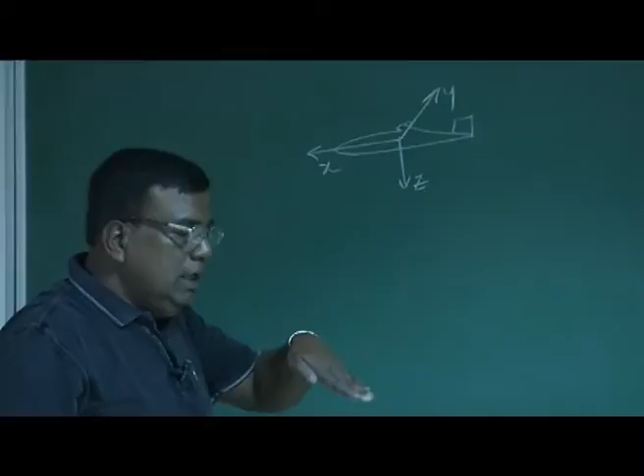Pitch, you understand - this is the x, this is the y, this is the z. Pure pitch is about the y-axis, and it's positive pitch if nose is going up, negative pitch if going down like this. So it has a pitch rate q, positive q, negative q.

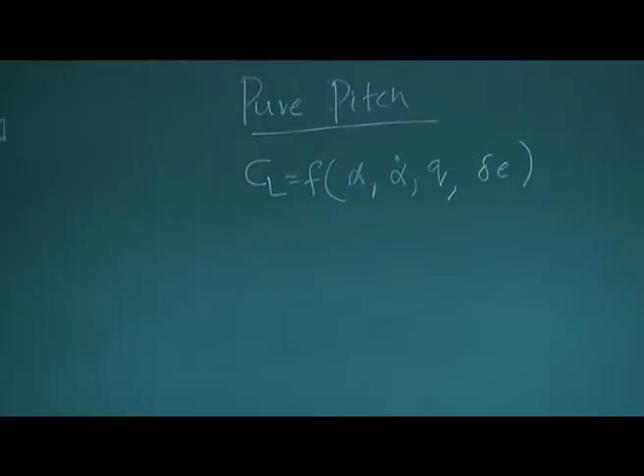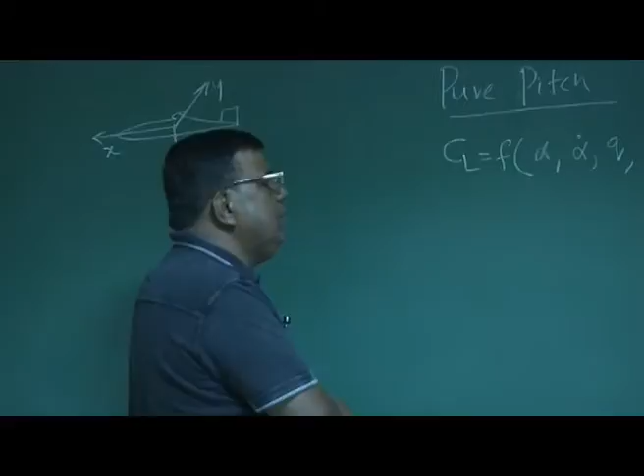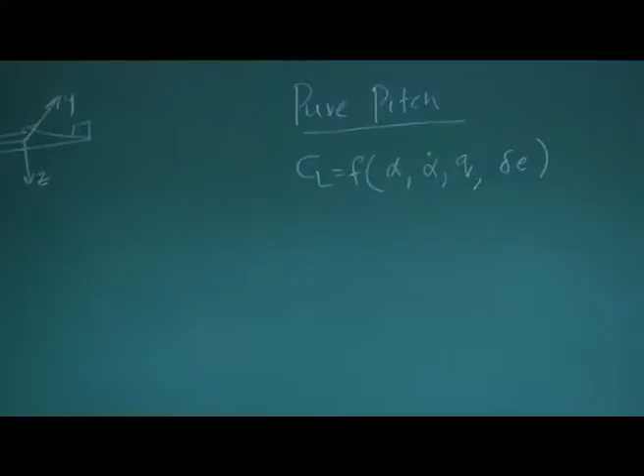And we know by now that CL is a function of alpha, alpha dot, q, delta E. For a highly maneuverable airplane, CL will be a function of other state variables also - maybe rates, maybe control derivatives, rate of control derivatives. But we have taken a simplified case where we are modeling CL as a function of alpha, alpha dot, q, and delta E. Similarly, Cm we express as a function of alpha, alpha dot, q, and delta E. And then we have become expert.

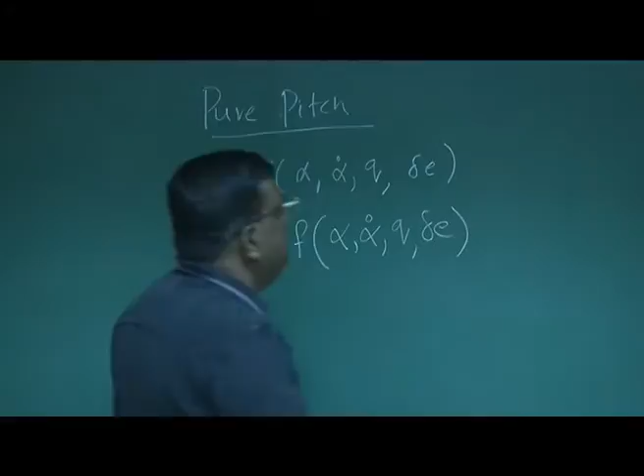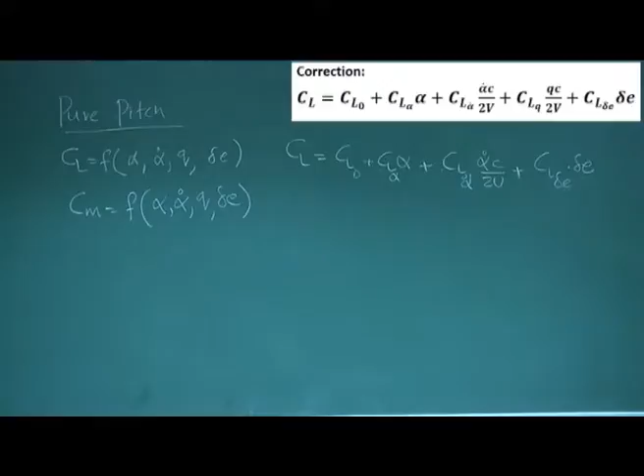We write CL as CL naught plus CL alpha into alpha, plus CL alpha dot into alpha dot C by 2V, plus CL delta E into delta E. When I write any rate derivative - alpha dot or q - they are in radian per second, but we want to use a non-dimensional form. So for q we write q C by 2V, and for alpha dot we write alpha dot C by 2V, because these are non-dimensional. This part we have cleared.

Now Cm also you write as Cm naught plus Cm alpha into alpha, plus Cm alpha dot into alpha dot C by 2V, plus Cm delta E into delta E, right?

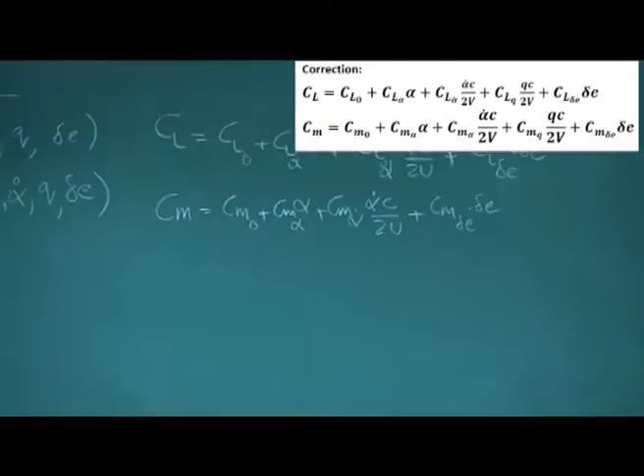When you talk about pure pitching, it means only theta is changing, or there is a Q. And the moment theta changes, it has its own effect. Let's say for an airplane, if I change theta, the angle of attack will change. So there will be a change in force in the z direction, in the x direction, and the airplane's center of gravity may start moving up.

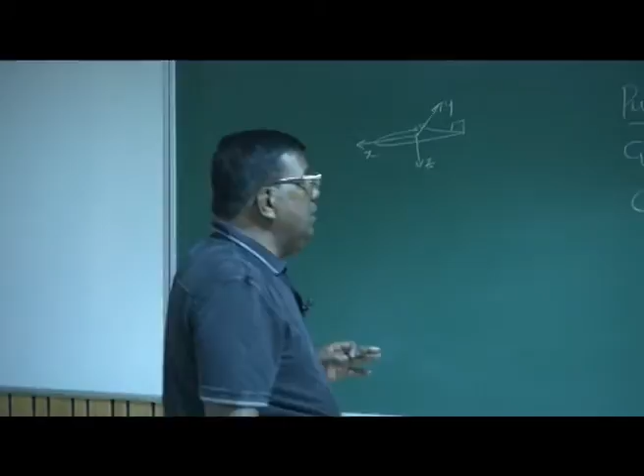But here, when we talk about pure pitch, only 1 degree of freedom is considered. We are not allowing the model to go up and down. It's only allowing the model to do this theta variation. Is it clear? Pure pitch has no such motion - no plunging motion is allowed. It's only the angular rotation about the y-axis that is allowed.

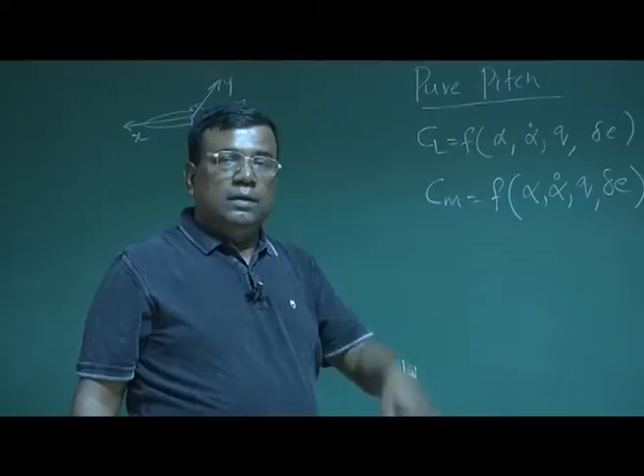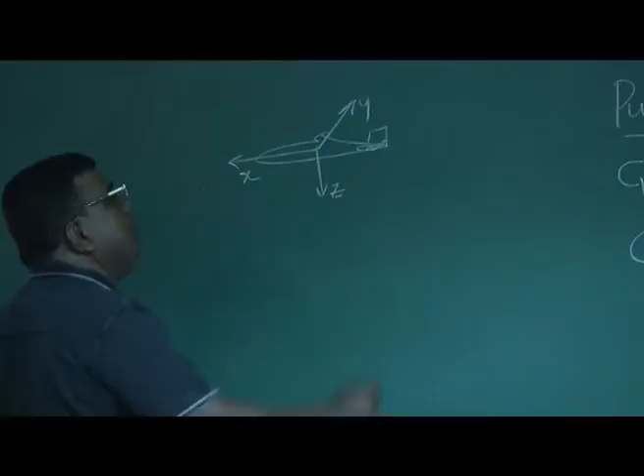But in actual practice, for an airplane, if I give some deflection of elevator, not only will theta change, it will also generate a situation where, because of alpha change and alpha dot change, it will have motion in the vertical z direction. That is being neglected in pure pitch - only angular motion is taken into account.

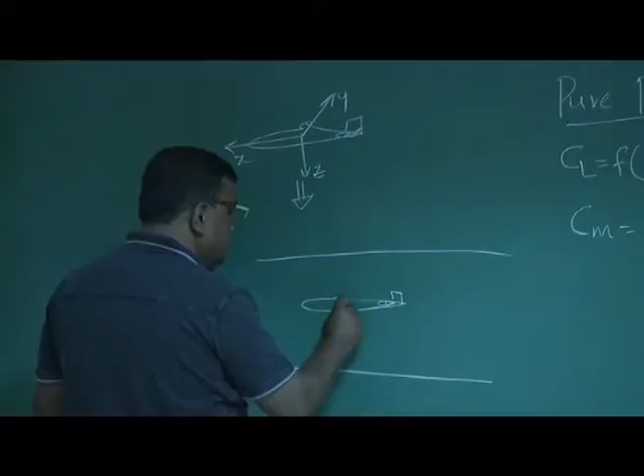So typically, to simulate this case, I can equivalently say that in a wind tunnel, I have put this aircraft model, and this model is fixed here, and the bearing is such that it will only allow this motion - it will not allow any plunging motion. So this is typically how I am simulating a pure pitch.

Let us see what this means practically. Remember, we define - if this is the airplane, we define this is our axis, and let's say this is the velocity vector and this is the horizontal.

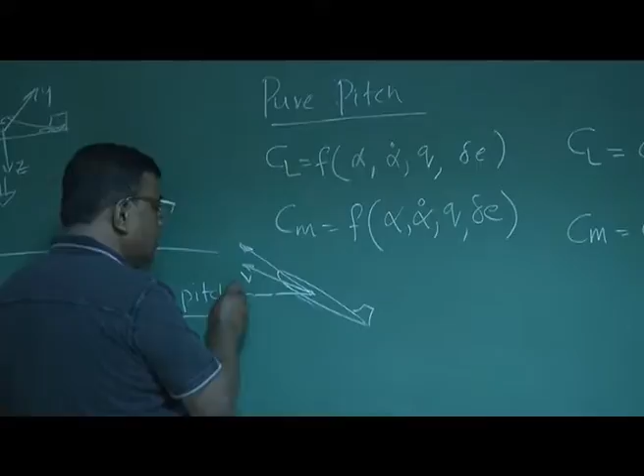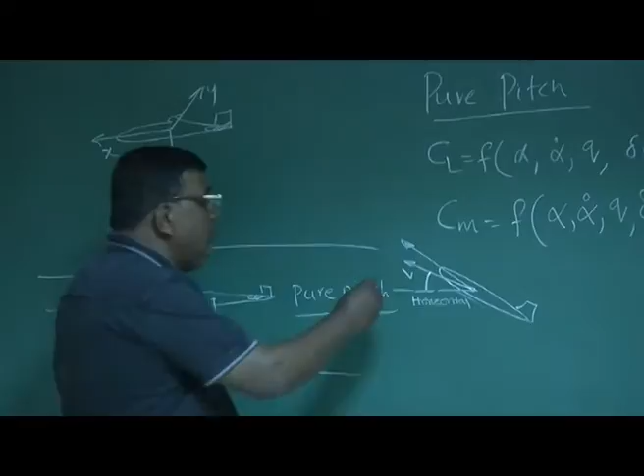What is this angle? This angle is the velocity vector making with horizontal, and that is the flight path angle, gamma. What is this angle? This is the angle between the axis, let's say chord, and the velocity vector - this is alpha, angle of attack. So what is this angle? The angle between axis and horizontal - this is nothing but theta, the pitch angle.

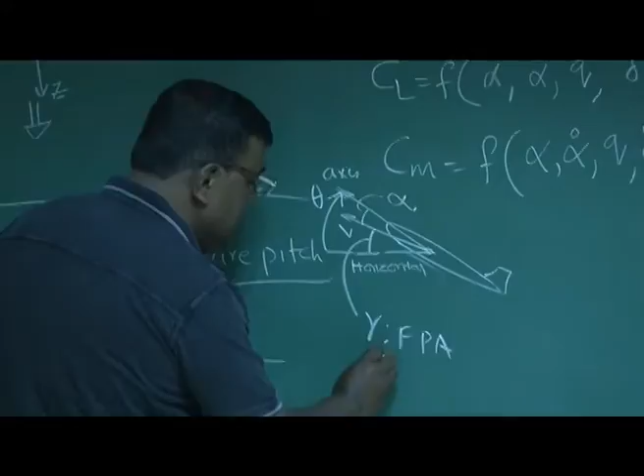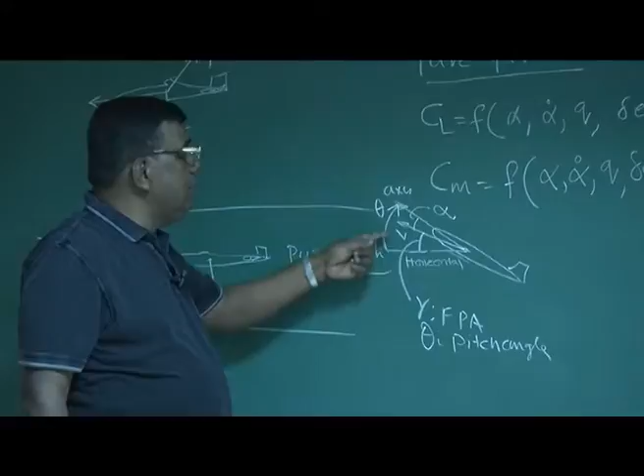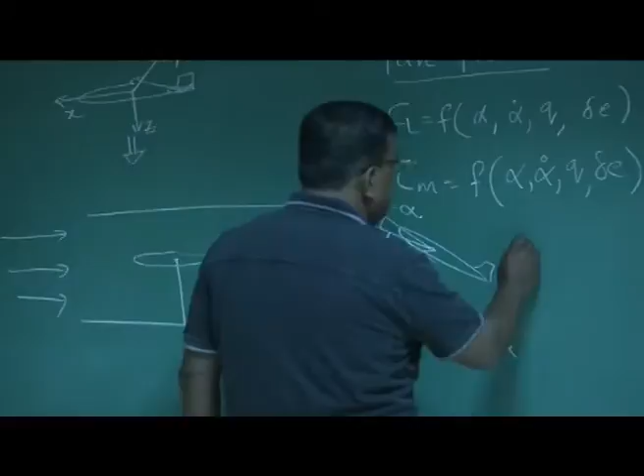Clear? Gamma was angle between velocity vector and horizontal. Theta is the angle between axis, which let's say chord axis, with horizontal. And alpha is the angle between velocity vector and axis. So this is the definition, and from here, theta equal to gamma plus alpha.

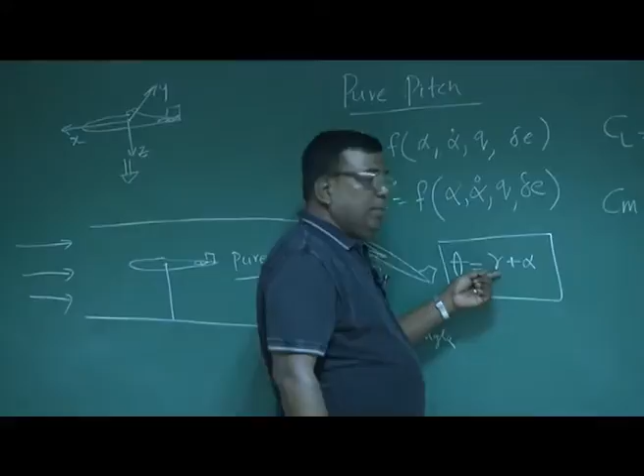So in actual free flight, whenever there is a control input which changes theta, it also changes alpha as well as gamma in general. Because if there is theta change, alpha changes. Alpha change means moment will come, the force will come through CL. So that will also change the motion of the CG of the airplane along z axis, so gamma will change. All these things are a representation of actual flight.

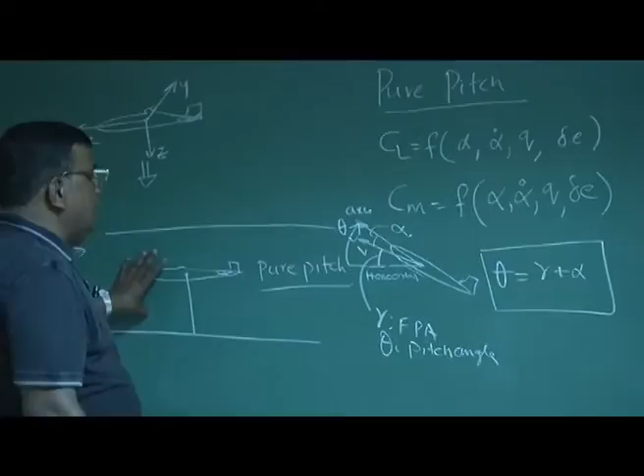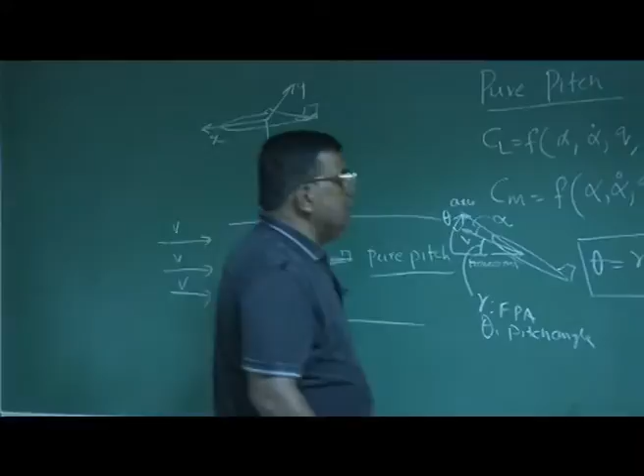But what happens in a tunnel? If I am doing tunnel, you see this is the velocity vector - so velocity vector never changes, direction never changes, right? Relative wind velocity doesn't change. So gamma is 0 for a pure pitch.

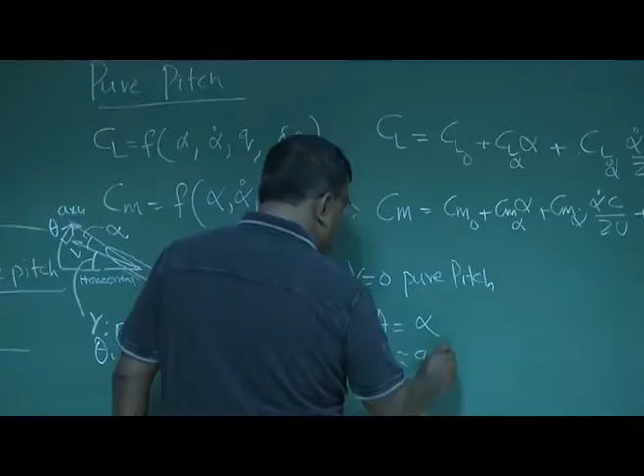Gamma is 0 implies theta equal to alpha, or theta dot roughly equal to Q and equal to alpha dot. And in a tunnel, theta dot is definitely Q, because there are no psi or any such motions, there are no bank angle, nothing is there. So I can strictly say in a tunnel, theta dot is truly Q, and Q is truly alpha dot.

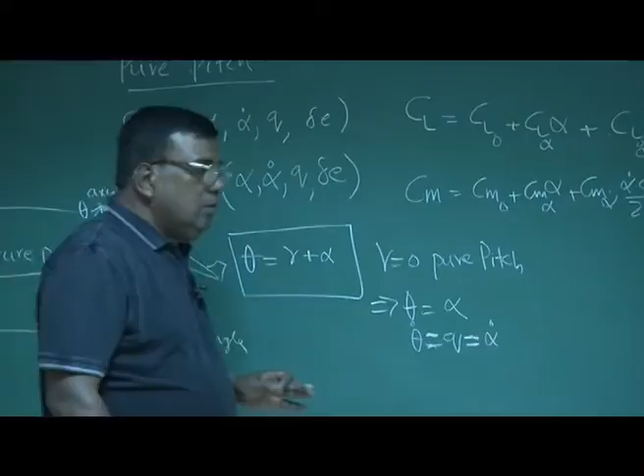So what the motion we are trying to study is, if I disturb a model - an aircraft model in a tunnel - if I give it elevator deflection and try to see how theta or alpha is going to vary, and from that response we would like to find out what is the natural frequency of this motion as well as what is the damping the aircraft is having.

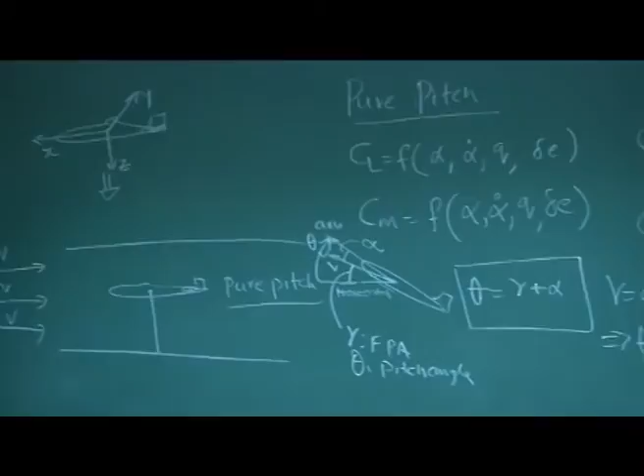So what we are trying to find out is what is omega n and what is zeta. Omega n is the natural frequency and zeta is the damping ratio, as we have discussed in previous lectures. So we are trying to simplify and try to see that we need not always work with a big equation as a designer. It's important that we have smaller expressions, handy expressions, so that we can get the initial estimates.

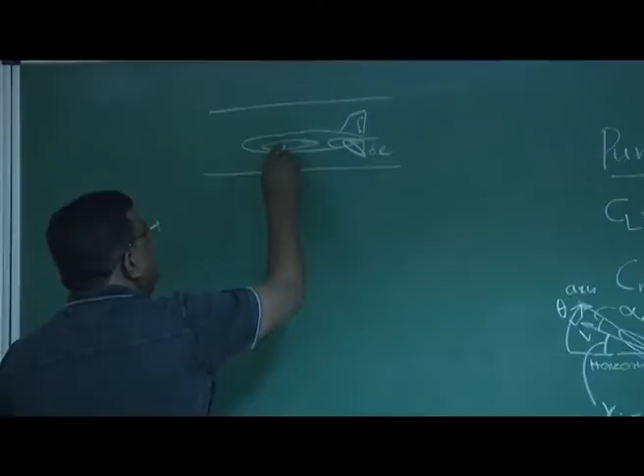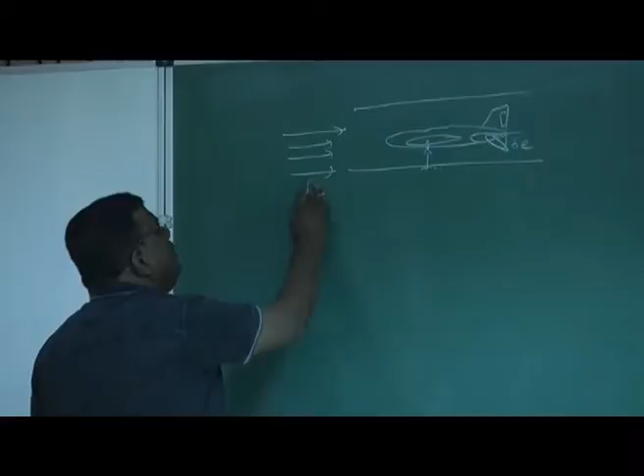Now think of a situation - if this is the tunnel and this is the model, this is the elevator, this elevator down is delta E, this is the CG, and there is the wing and vertical tail here, rudder here. If I give an elevator deflection and this is being exposed to a constant velocity v, or let's say u, then how do I write the equation of motion?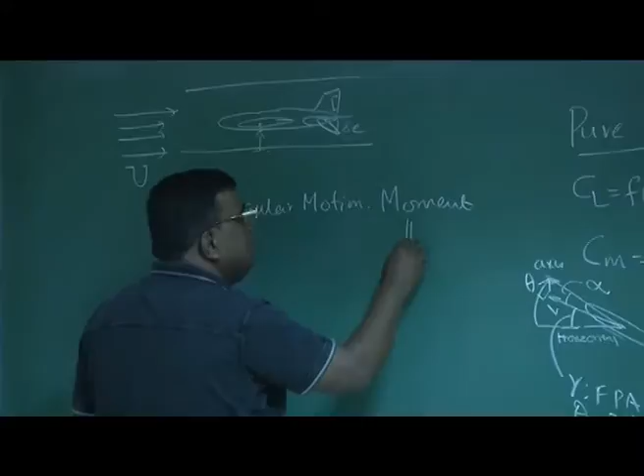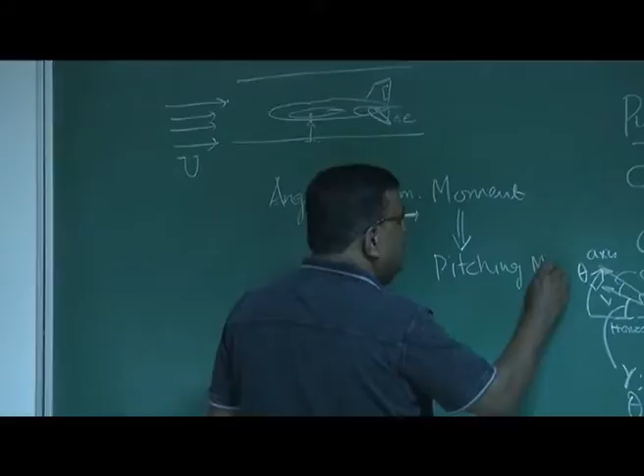We are talking about angular motion, so it is the moment that will decide this. This is the pitching moment, about what axis? It is about the y-axis. So this is x, this is y, and this is z. We are talking about pitching motion about y-axis.

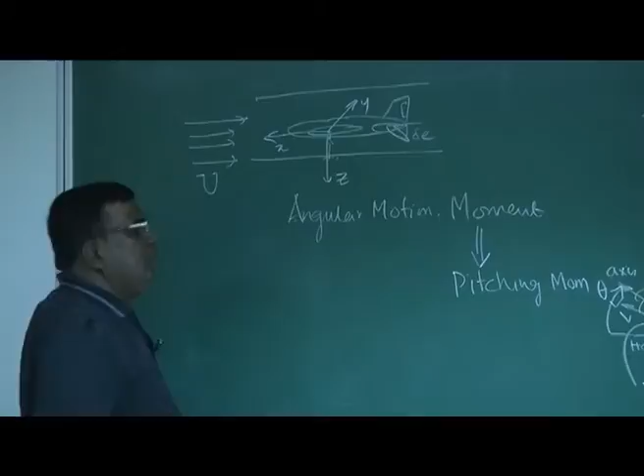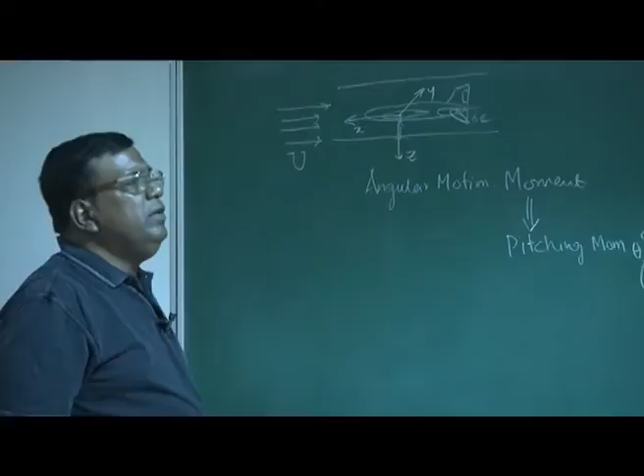We are also putting a condition that we are talking about small disturbance. Because if I give larger disturbance, then it is very difficult to expand CL as a linear combination of all this, since the flow and aerodynamics become non-linear. So one condition we are putting is small disturbance, and that was the basis of small disturbance theory, whatever we have developed earlier. So we are not violating from that.

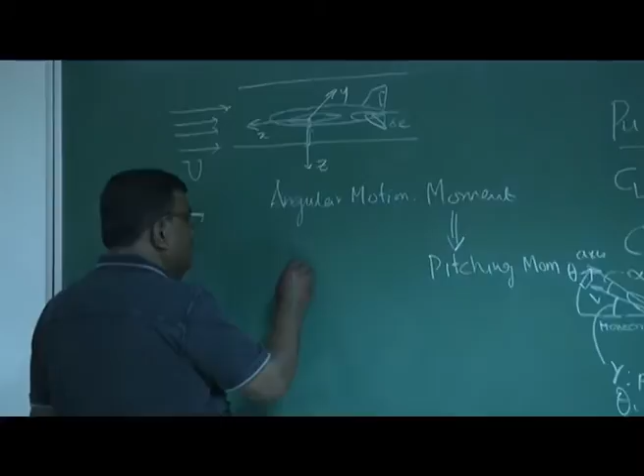Also we are now assuming that the wing is symmetric. And for simplicity we take Cm naught equal to 0 - it's just for algebraic simplicity.

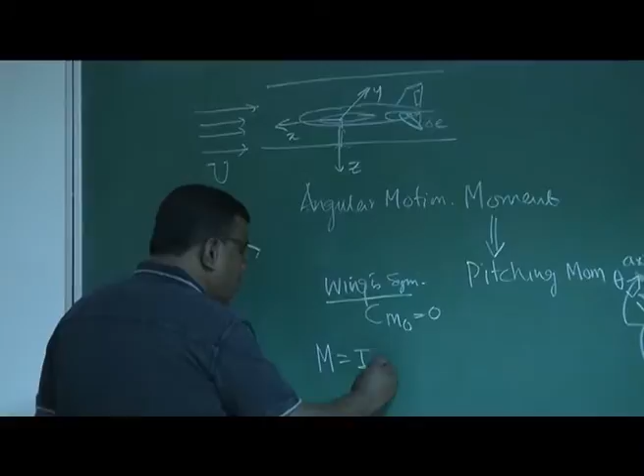So now since we are talking about moment and pitching moment, this moment is equal to I y into q dot, because we are only talking about this motion. There is nothing coming from yaw rate or roll rate - it is only pure pitch. So I can write m equal to I y q dot.

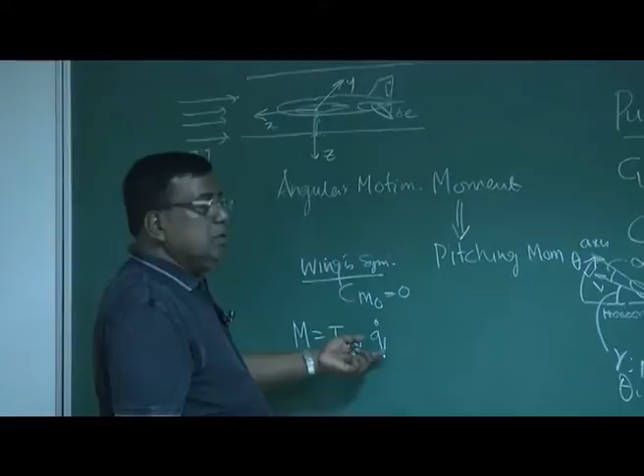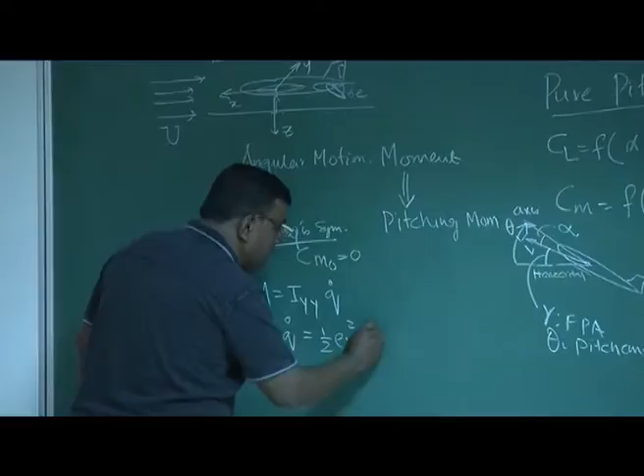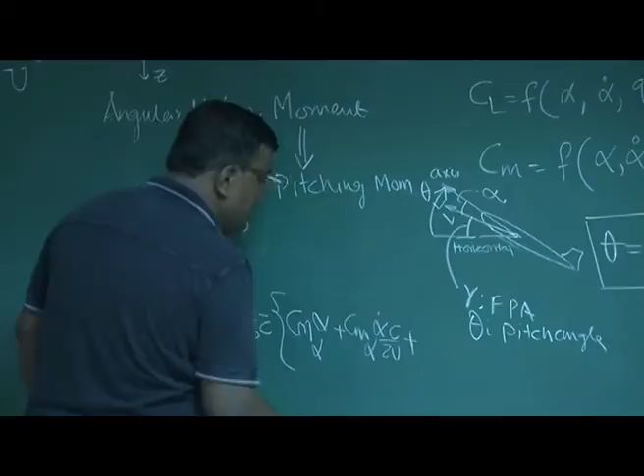And what is m? I know I y q dot equal to moment is half rho v square s c bar into Cm alpha into alpha, plus Cm alpha dot into alpha dot c by 2u, plus Cm q into qc by 2u, plus Cm delta E into delta E.

Correct? Note that here Cm naught I have put 0 only for algebraic simplicity. You can put Cm naught and go on doing your analysis. So let me erase this part.

Using this equation I can write q dot equal to half rho v square s c bar by Iyy into Cm alpha into alpha, plus Cm alpha dot into alpha dot c by 2u, plus Cm q into qc by 2u, plus Cm delta E into delta E. So I can further write, simplified, q dot equal to M alpha into alpha, plus M alpha dot into alpha dot, plus Mq into q, plus M delta E into delta E.

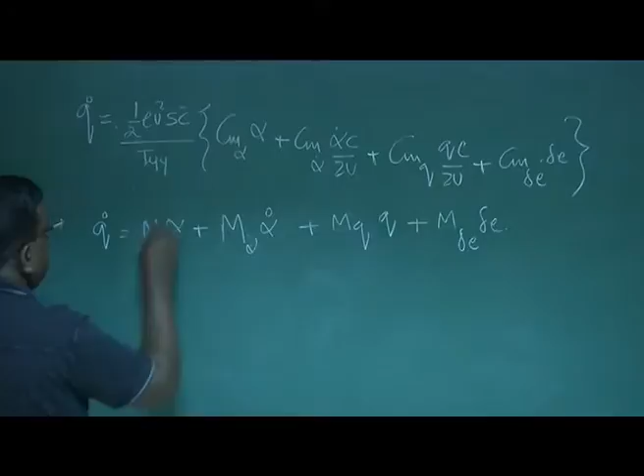What I have done: I have clubbed half rho v square SC bar by Iyy into Cm alpha as M alpha. So M alpha equal to half rho v square SC bar by Iyy Cm alpha. Similarly, what is M alpha dot? M alpha dot is nothing but, again, half rho v square SC bar by Iyy into C by 2u into Cm alpha dot. That becomes my M alpha dot.

So what is MQ then? MQ is, again, half rho v square SC bar by Iyy into C by 2u into CMQ. You can simplify this by doing some algebraic operation; the v square and v is there, so it becomes 1/v, that I leave to you. So it is very easy now to know what is M delta E. M delta is nothing but half rho v square SC by Iyy into Cm delta E.

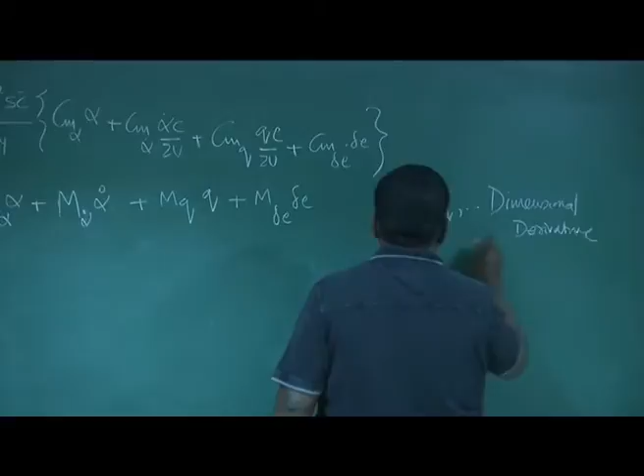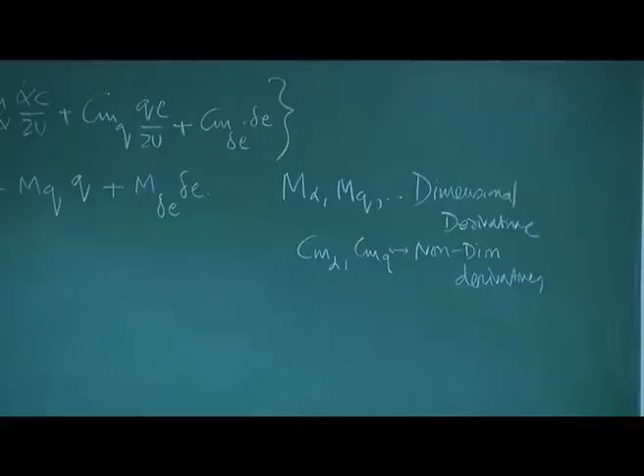So you allow me to write this Q dot as this, where M alpha dot, MQ and M delta E are referred to as dimensional derivatives. So M alpha, MQ, etc. are known as dimensional derivatives. In contrast, if I write Cm alpha and Cmq, they are non-dimensional derivatives. It is obvious that if you see the dimension of M alpha, you will find, yes, indeed, it has a dimension. You can check yourself by putting all the dimensions.

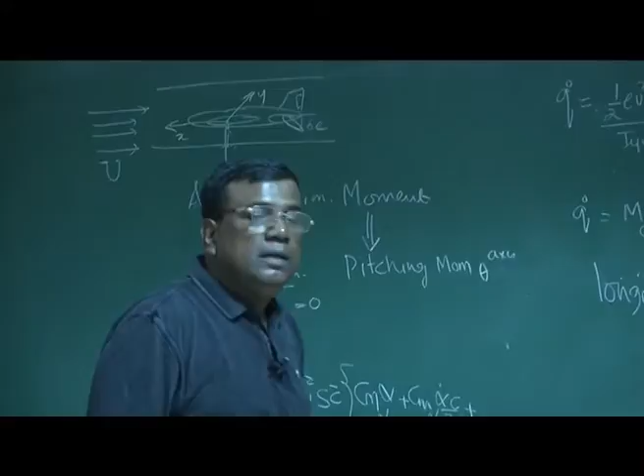So we are writing pure pitch equation in longitudinal motion. Pure pitch means we are talking about longitudinal motion, restricted only to theta degree of freedom. So no plunging motion is allowed, and also we are implicitly assuming constant speed or velocity, because we are simulating a case of pure pitch which can easily be simulated in a tunnel. But pure pitch cannot easily be simulated in an open atmosphere, because the moment you give some deflection, there will be plunging motion as well. But there is a definite meaning of why we are looking for pure pitch.

You will see that if this plunging motion is not really much, then a lot of information I get from this simple equation, in terms of natural frequency of that mode as well as the damping ratio. And that is why we are doing this.

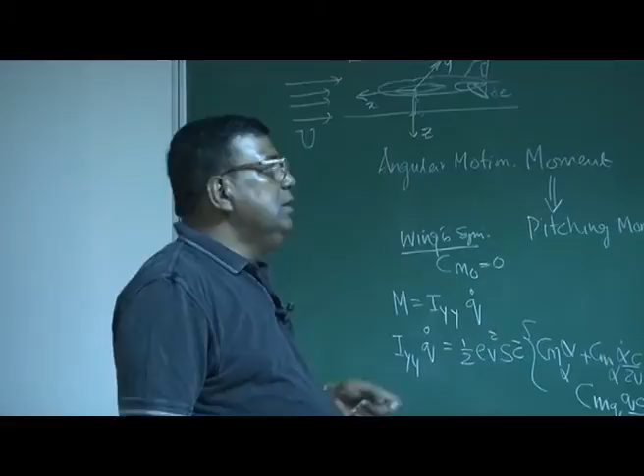So now I take Laplace transform, with initial condition 0, and you know all these things very well. We are talking about a linear system, and it doesn't depend upon the initial condition. So by putting initial condition to 0, it doesn't change anything. We have discussed this in the last few lectures.

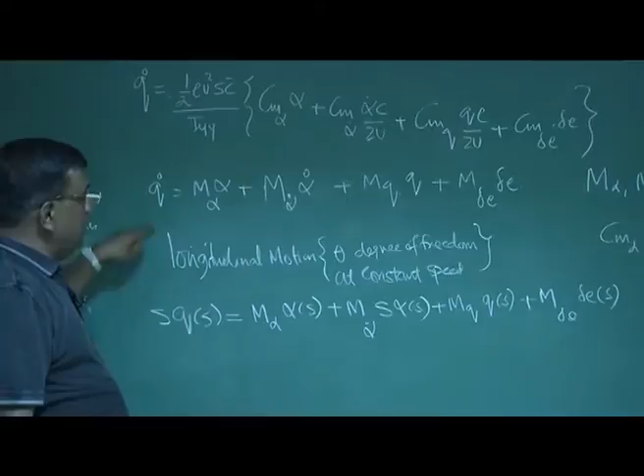So I write SQ(S) equal to M alpha into alpha(S) plus M alpha dot into S alpha(S) plus MQ into Q(S) plus M delta E into delta E(S). And you know very well alpha(S) means the Laplace transform of alpha, which is in time domain. We have taken the Laplace transform here because this equation was in time domain. We are converting into frequency domain using Laplace transform, and you could easily see that this was a differential equation and this becomes an algebraic equation.

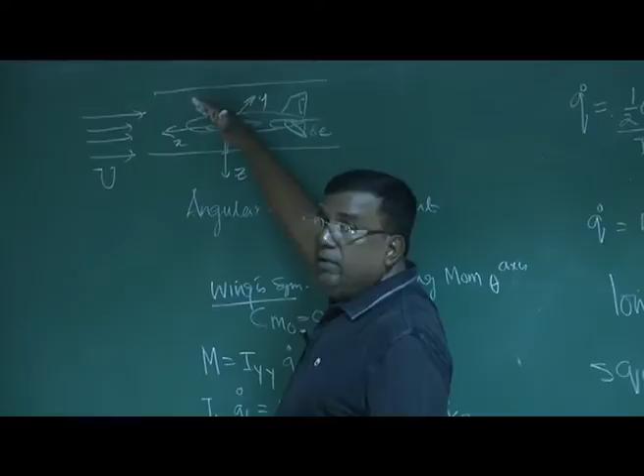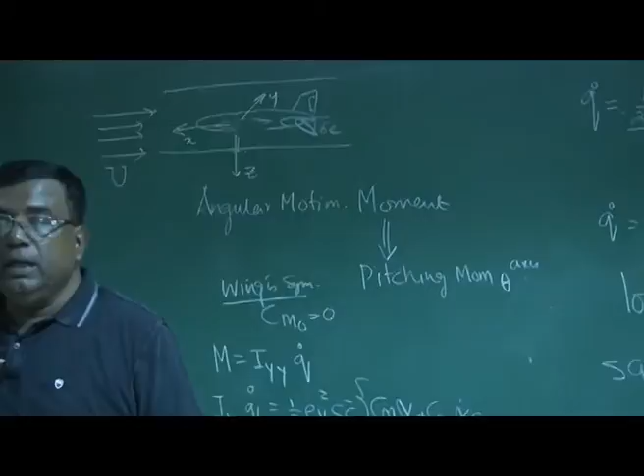There is ease of operation. Now here we will do a little trick. We know Q is equal to theta dot for pure pitch, and theta is equal to alpha for pure pitch, because if it is only motion like this, then whatever theta is there, that is only alpha, isn't it? Because this is alpha 0, theta 0. If I have theta like this, this angle between the axis and the horizontal becomes theta, but similarly the angle between the velocity vector and the axis becomes alpha, so theta equal to alpha. So again you can check it.

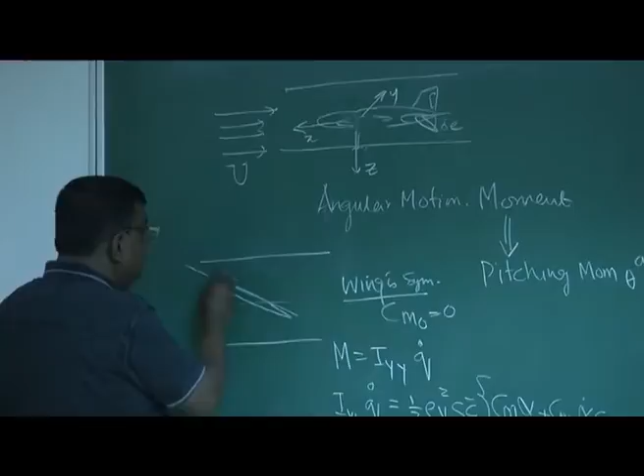If this is a tunnel, if I have moved the model like this, then this is my axis, say chord line, and velocity vector remains like this. So this is alpha, the angle between velocity vector and the chord line. Also, theta is the angle between the axis and the horizontal, and incidentally velocity vector and horizontal are the same, they're parallel.

So this becomes theta also for a wind tunnel simulated case, which indirectly means if gamma is 0, that is theta equal to gamma plus alpha. So if gamma is 0, that implies theta equal to alpha, and if gamma dot is 0, this implies theta dot equal to alpha dot.

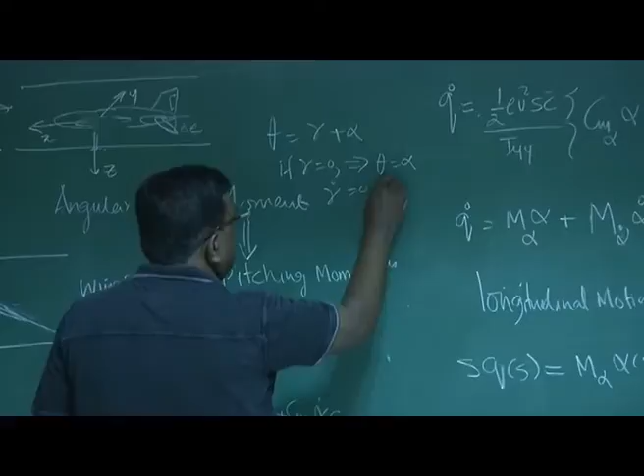What is the physical meaning? If the disturbance is so small that it doesn't really create large plunging motion, then this approximation will work very well to get some relevant understanding about natural frequency and damping ratio, which is our target. So we are not very far off from here. We are talking about small perturbation, and that is where this simple equation has got so much meaning for a designer. Okay, so we come here.

So now from this relationship I can write Q is equal to alpha dot and Q dot equal to alpha double dot. I repeat here, since theta equal to alpha and Q is theta dot, Q equal to alpha dot and Q dot equal to alpha double dot.

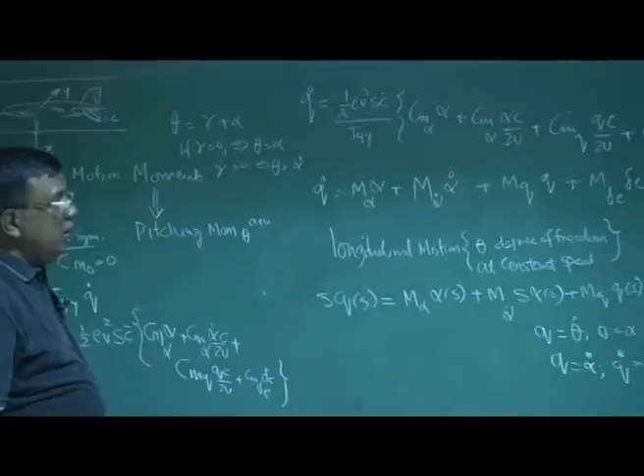Why do you want Q dot? Because you could see here, Q dot was there. If I substituted alpha double dot, we would have got S square alpha S, right? Anyway, there are many ways of doing this, but you should be clear about this understanding.

Now here, I will write the whole equation in terms of alpha S. So this will be S. For Q of S, I can write, from here, Q of S equal to S theta of S, and theta of S is alpha of S, so I can write S alpha of S. Is it clear? Q equal to theta dot. So Q of S is equal to S theta S, and theta is equal to alpha, so S alpha S.

So what happens here? For Q of S, I write S alpha S, so it becomes S square alpha S equal to M alpha into alpha of S plus M alpha dot into, S is already there, so this is alpha S, plus MQ, and for Q of S, I again write S alpha of S, plus M delta E into delta E of S. That's all.

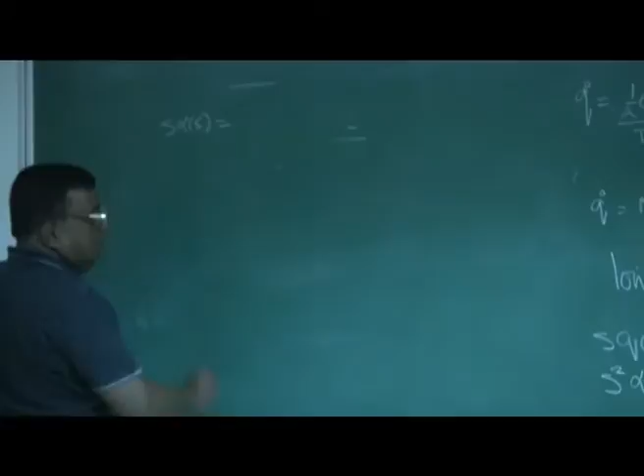Let me write it again so that you understand, because I could see so many terms going here and there. Let us write it again. S alpha of S is equal to M alpha into alpha of S, no problem, plus M alpha dot into S alpha of S, no problem here, plus MQ into Q of S, then M delta E into delta E of S, right?

But we know that Q of S, already you have seen, Q of S equal to S alpha of S. Generally, it is customary to use S in small cap, but for clarity, I am writing like this. So what do you get? We get, oh, this is not alpha S, please understand, this will be Q of S. Okay, this is S Q of S, come back here.

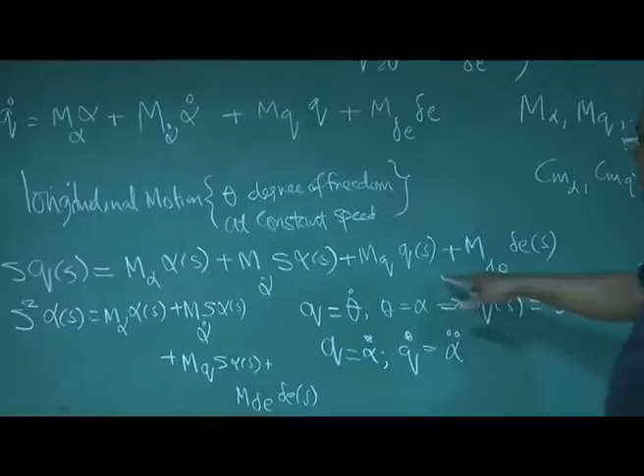S Q of S equal to M alpha into alpha S, M alpha dot into S alpha S, plus MQ into Q of S, plus M delta E into delta E of S. But what do you know? Q of S is equal to S alpha S, right? Simply I'll put there. So what will happen?

This will become S square alpha of S, because Q of S is S alpha S, so S into S becomes S square. Alpha S, this is sitting pretty with S M alpha alpha S, and this is M alpha dot S alpha S. And then for MQ, I'll write MQ. And what is Q of S? Q of S is S alpha S. So again, I write here S alpha of S plus M delta E into delta E of S.

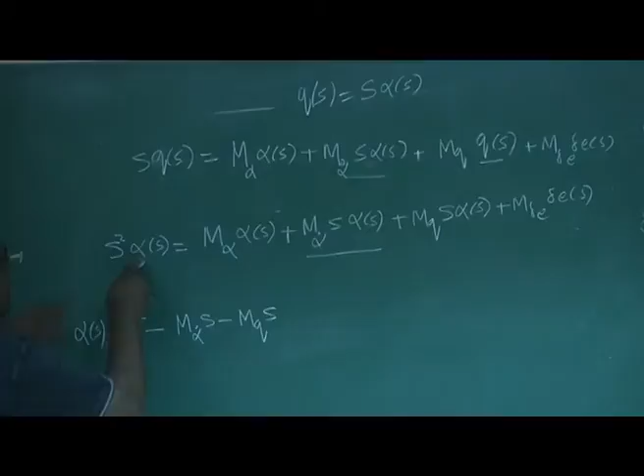That is the expansion. So if I now do one trick, I take this term to the left hand side, then what do I get? I get S square minus M alpha dot S minus MQ, S square minus M alpha dot S. This is S square. So M alpha dot S alpha S. So I'm trying to take alpha S common. Okay, so for this S square, for M alpha dot I bring it here.

So this will be S M alpha dot. MQ I'm taking here, so it will be MQ S. Okay, now M alpha I take it here, so it will be minus M alpha.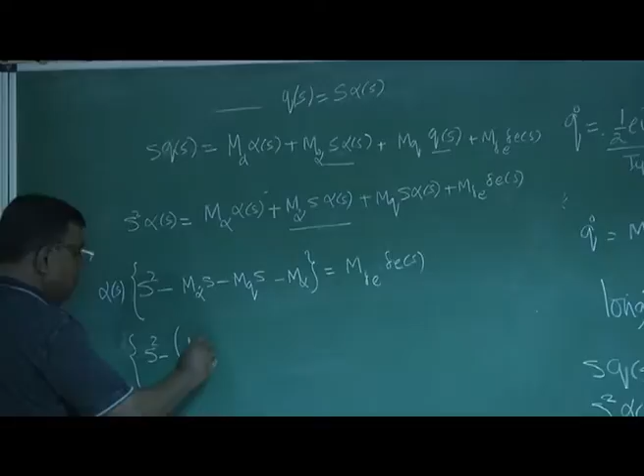This is equal to M delta E into delta E of S. Let me write it differently now. So I write it as S square minus MQ plus M alpha dot S minus M alpha. This equal to M delta E into delta E of S.

Let us not forget again, what are these M alpha dot, MQ, M alpha, M delta E? They are basically dimensional derivatives. When I think of M delta E, immediately I know the non-dimensional derivative is Cm delta E. That is, what is the increase in Cm because of elevator deflection, whose sign is negative. And this is dimensional, but Cm delta E is non-dimensional, right? So you know these expressions.

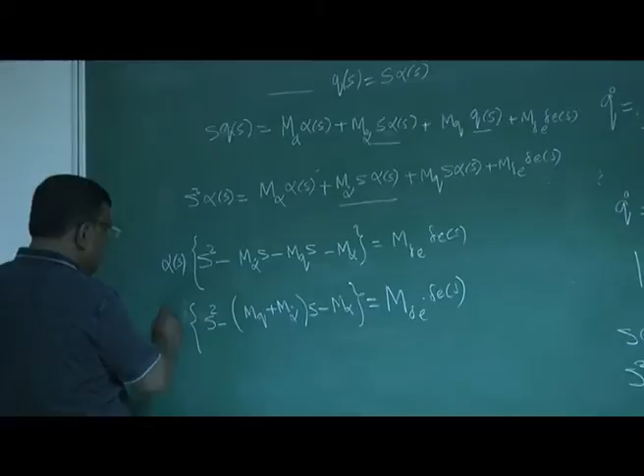So now I can write this as, here alpha S has to come. So I can write as alpha S by delta E of S is equal to M delta E by S square minus MQ plus M alpha dot S minus M alpha.

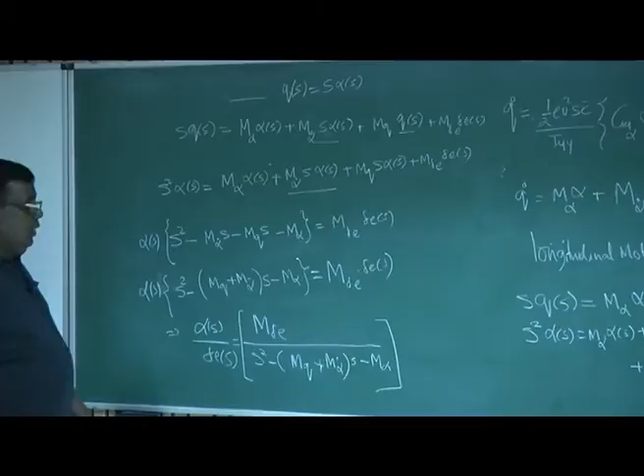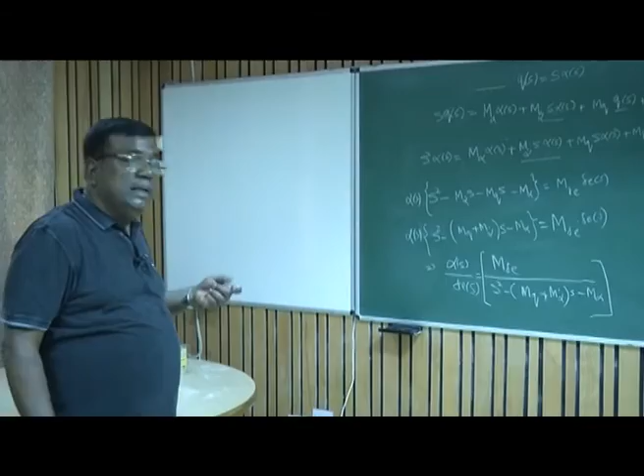We have seen almost similar looking term in a complex manner in our 6-DOF equation. This is a special case of the 6-DOF equation of motion. What we will do in the 6-DOF stability matrix, we will put those simplifications so that it results in a similar expression for pure pitch. So before we go to those exercises, we are trying to understand what is pure pitch and how does it help us. Now what is this alpha S by delta E of S? This is conventionally known as transfer function.

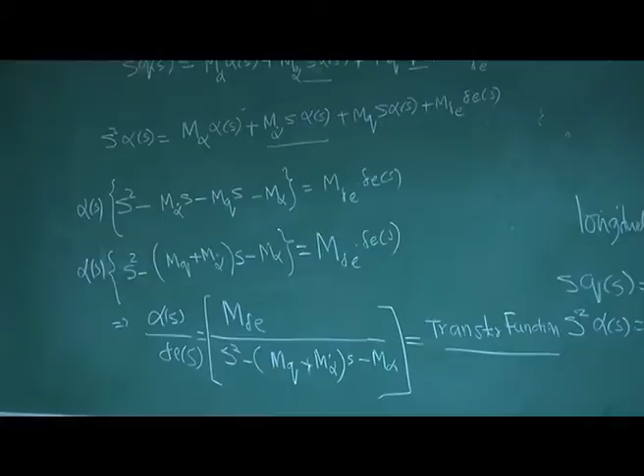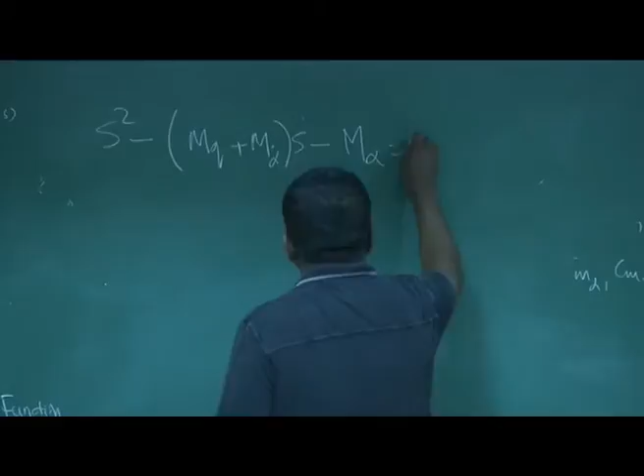Now if you want to find out natural frequency and damping ratio for pure pitch longitudinal motion, this is very straightforward. You know that the characteristic equation is S square minus MQ plus M alpha dot S minus M alpha equal to 0.

And I compare it with second order system, S square plus 2 zeta omega n S plus omega n square equal to 0. If I compare, then I get omega n square is equal to minus M alpha, and 2 zeta omega n equal to minus MQ plus M alpha dot, right, because this is 2 zeta omega n S.

So what is the natural frequency? Natural frequency is under root of minus M alpha, and you could always see the zeta will be equal to minus MQ plus M alpha dot, divided by 2 into omega n, which is nothing but root of minus M alpha. What a neat expression, right?

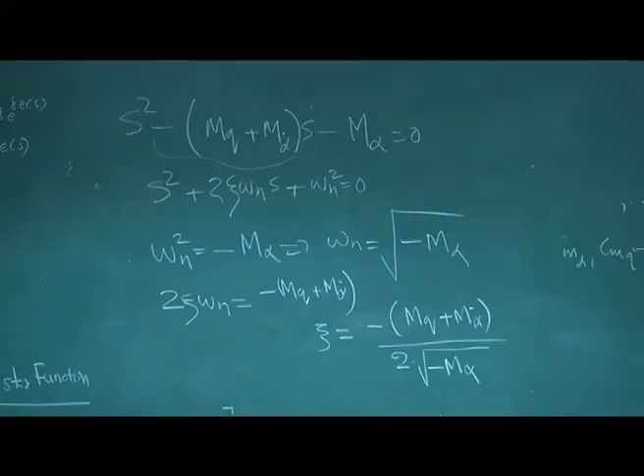You may wonder, this omega n will become complex. Is it true? No, because if you see M alpha, what is the expression of M alpha? That's nothing but half rho V square S c bar Cm alpha by Iy. That is M alpha. Now, for a statically stable airplane, Cm alpha is negative, so M alpha sign is negative. So this negative, when you put negative and positive, omega n you get a positive number. So no confusion or no conflict.

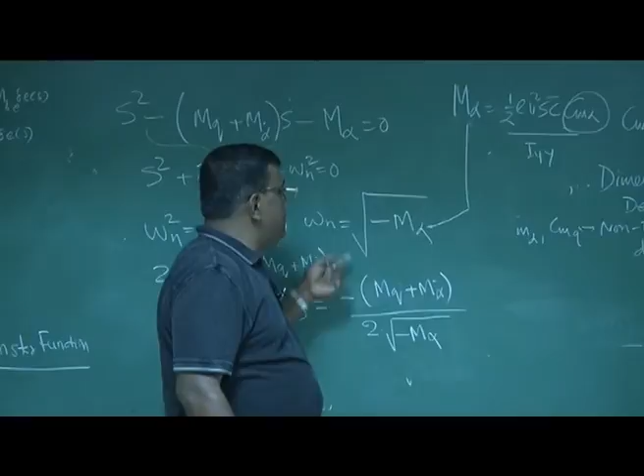This is a very simple way of handling a pure pitch motion through modeling, and we'll check when you'll be solving the 6-DOF equation of motion, and you'll be getting a solution for some motion closer to pure pitch, how much they come close. And that way you can take a decision, especially in the design stage. You don't want to solve those big equations because you don't have complete information.

So this sort of understanding makes you very comfortable, because you know the zeta you want maybe 0.6 or 0.5. So immediately you can see what is the MQ required, what is the M alpha required. If I want natural frequency of 13 hertz or 10 hertz or 2 hertz, I know what sort of configuration is required for me, and quickly I can find out those derivatives.

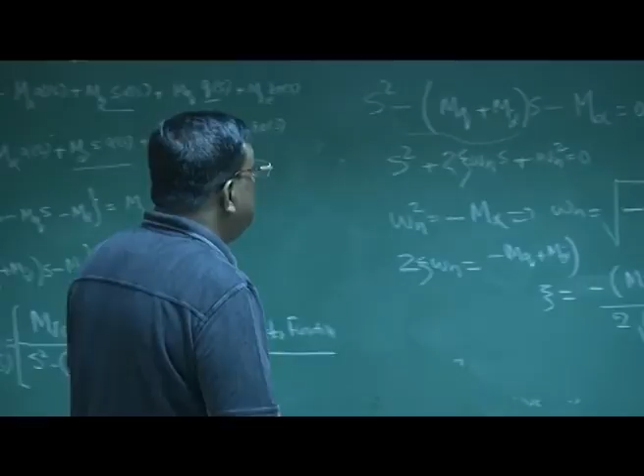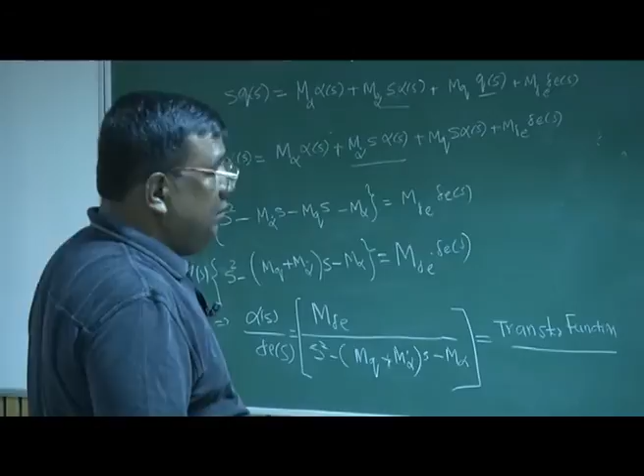But understand, this whole thing is for longitudinal motion, angular motion, right? In aircraft, we will find damping and natural frequency of different modes will be required. It only addresses this, which you will see is fairly close to a short period excitation. So today we have just made an attempt to understand pure pitch motion and how to compute natural frequency and damping ratio. And you will see how handy this is when you will be getting some information related to natural frequency and damping ratio using our 6-DOF equation of motion in frequency domain.

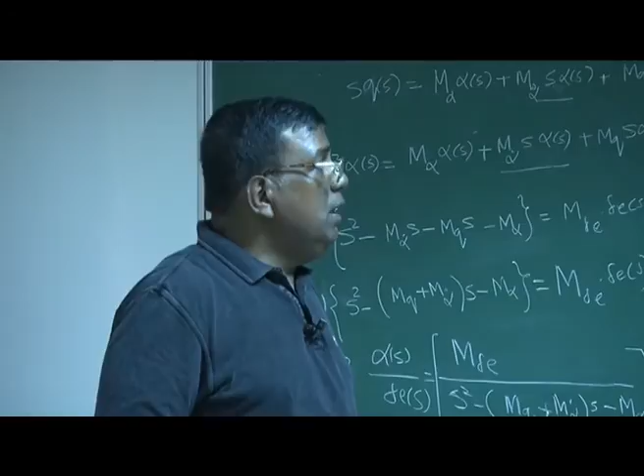And you will also appreciate how wonderful these approximations are for a designer, and the designer's life becomes very comfortable. Otherwise, he has to handle big matrices. He doesn't like that. To start with, when I try to configure an airplane, I want simple things. I should be able to have a feel. I should be able to smell the numbers. Not that I have to wait for a computer to give me some number in decimals. No, that's not the design I look for. Design I look for is pure understanding, good approximations, relevant approximations, and get a concrete number.

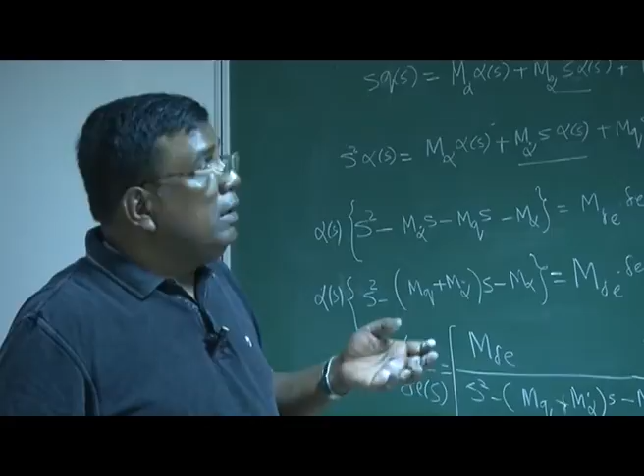Okay, so with this, I am just ending. We'll come back to this again. You see how beautifully this can be used for designing a stability augmentation system, which is a lifeline for all control systems. Thank you very much.